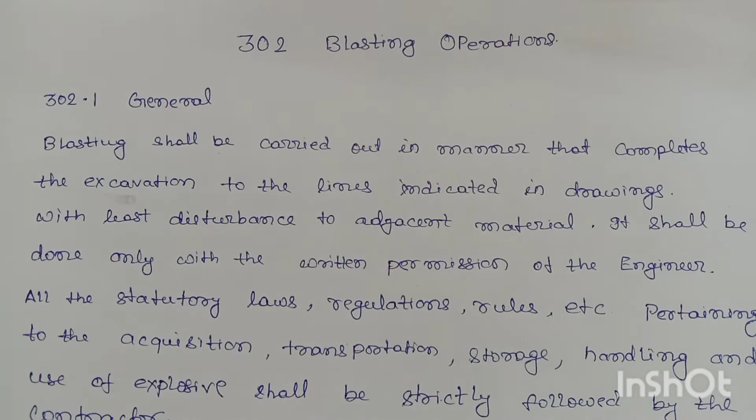All the statutory laws, regulations, rules, etc. pertaining to the acquisition, transportation, storage, handling, and use of explosive, all such shall be strictly followed by the contractor. The contractor may adopt any method or methods of blasting consistent with safety and job requirements.

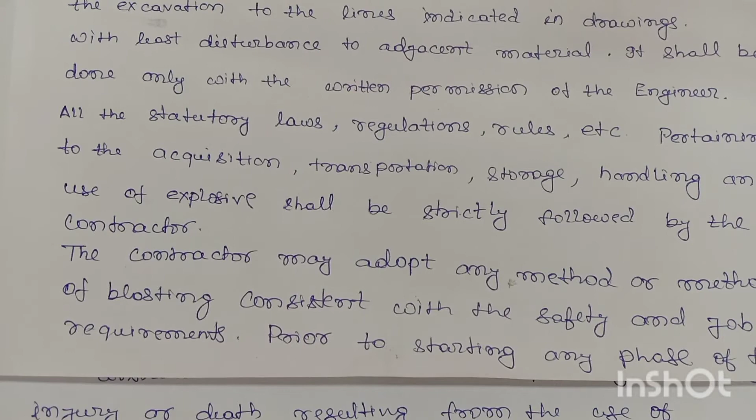Prior to starting any phase of the operation, the contractor shall provide information describing pertinent blasting procedure, dimensions, and notes.

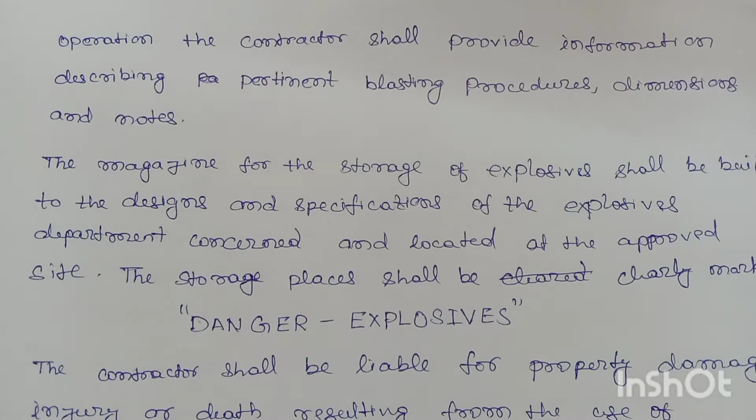The magazine for the storage of explosives shall be built to the design and specification of the explosives department concerned and located at the approved site. The storage place shall be clearly marked 'danger explosive'.

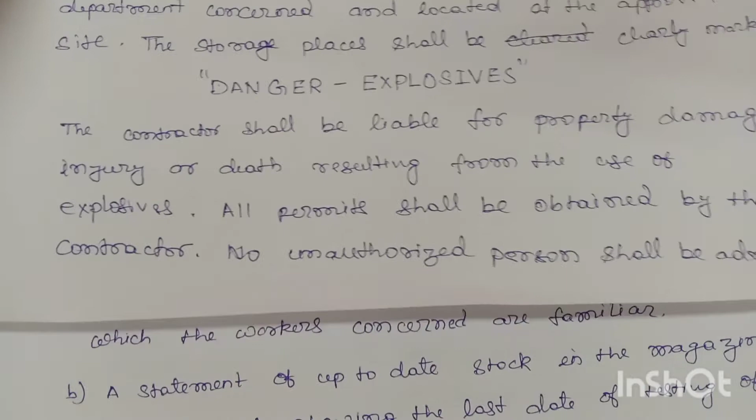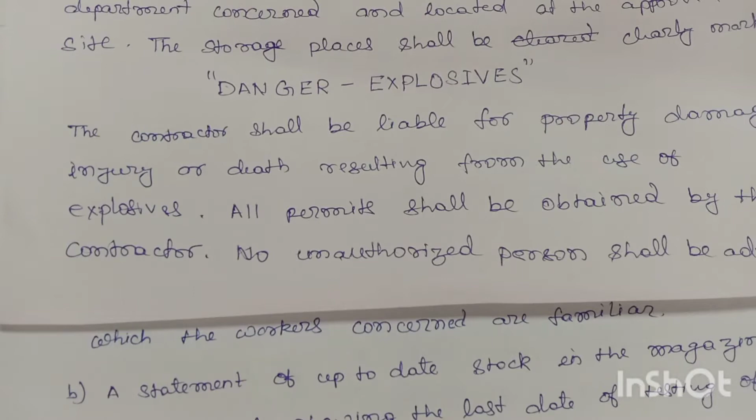The contractor shall be liable for the property damage, injury, or death resulting from the use of explosive. All permits shall be obtained by the contractor. No unauthorized person shall be admitted into the magazine, which, when not in use, shall be kept securely locked.

No matches or inflammable material shall be allowed in the magazine. The magazine shall have an effective lightning conductor.

The following shall be hung in the lobby of the magazine: a copy of the relevant rules, regulations, safe storage, both in English and the language with which the workers concerned are familiar; a statement of up-to-date stock in the magazine; a certificate showing the last date of testing of the lightning conductor; and a notice that smoking is strictly prohibited.

All explosives shall be stored in a secure manner in compliance with all laws and ordinances, and all such storage shall be marked. where no local laws or ordinances apply, storage shall be provided to the satisfaction of the engineer, and in general not closer than 300 meters from the road or from any building, camping area, or place of human occupancy.

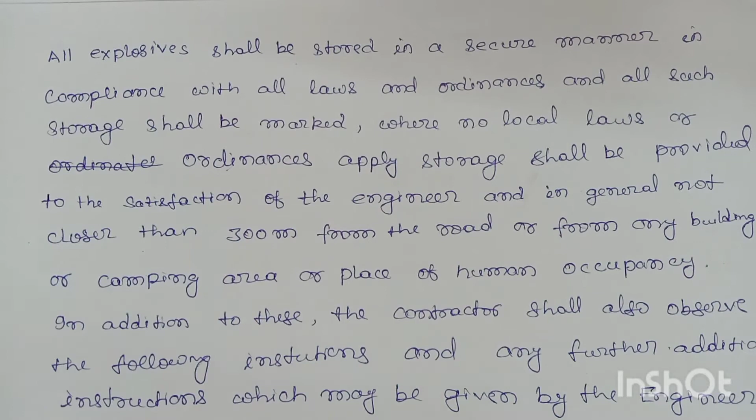In addition to these, the contractor shall also observe the following instructions and any further additional instruction which may be given by the engineer, and shall be responsible for the damage to property and any accident which may occur to workmen or the public on account of any operations connected with storage.

Handling or use of explosive and blasting: the engineer shall frequently check the contractor's compliance with these precautions.

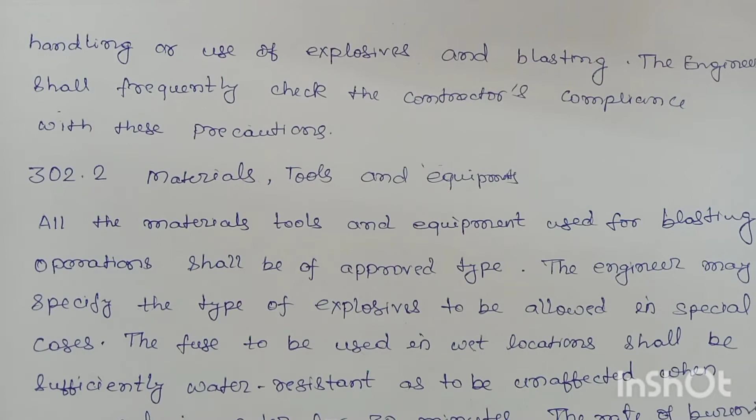302.2 Materials, Tools and Equipments. All the materials, tools and equipments used for blasting operations shall be of approved type. The engineer may specify the type of explosive to be allowed in special cases.

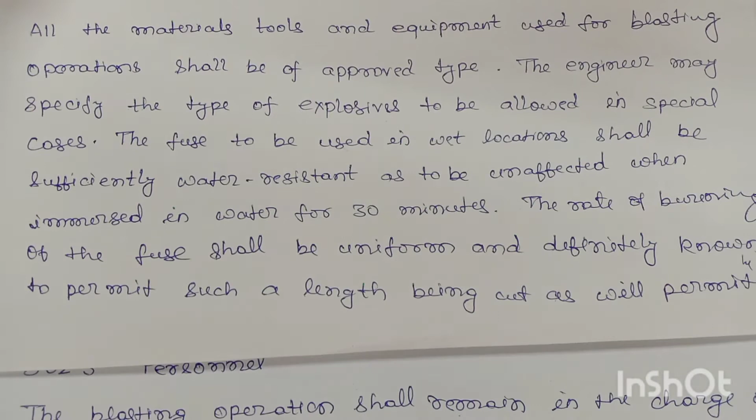The fuse to be used in wet location shall be sufficiently water resistant as to be unaffected when immersed in water for 30 minutes. The rate of burning of the fuse shall be uniform and definitely known, to permit such a length being cut as will permit sufficient time for the firer to reach safety before the explosion takes place. Detonators shall be capable of giving effective blasting of the explosive.

The blasting powder, explosive, detonators, fuses, etc. shall be fresh and not damaged due to dampness, moisture, or any other cause. They shall be inspected before use, and damaged articles shall be discarded totally and removed from the site immediately.

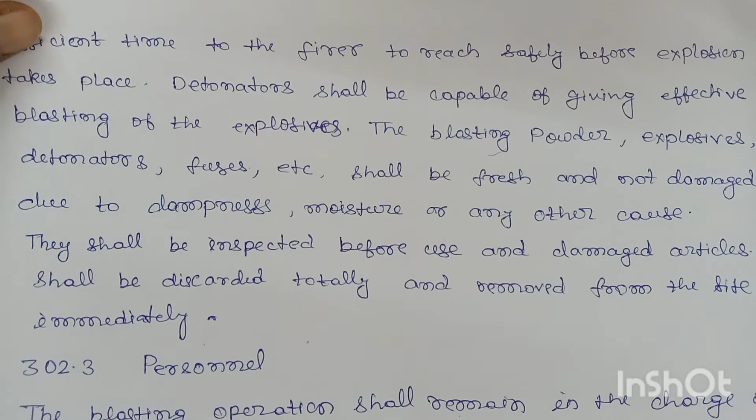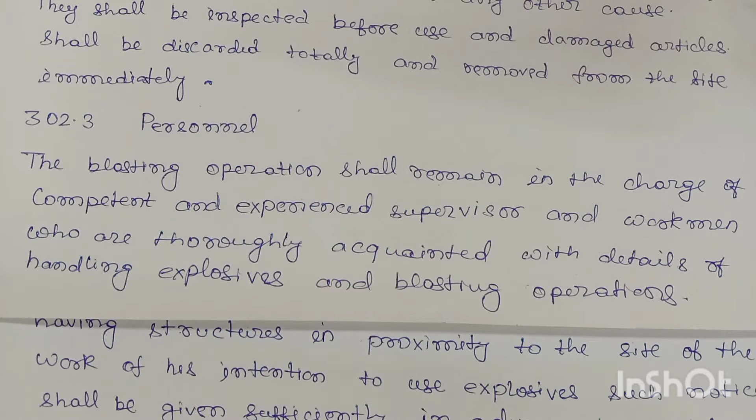302.3 Personnel. The blasting operation shall remain in the charge of a competent and experienced supervisor and workmen who are thoroughly acquainted with the details of handling explosives and blasting operations.

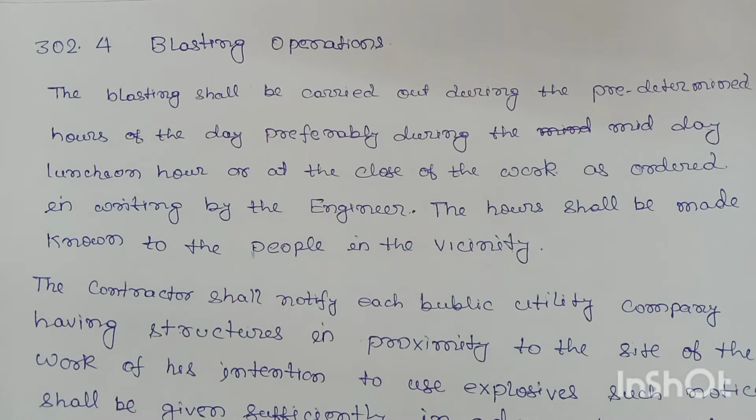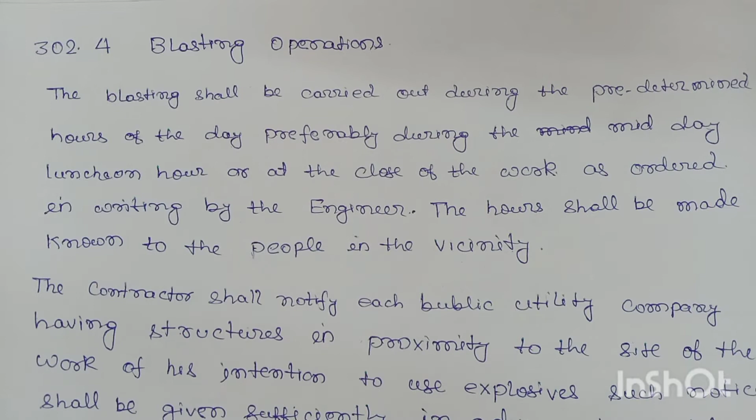Blasting operations shall be carried out during predetermined hours of the day, preferably during the midday luncheon hour or at the close of work, as ordered in writing by the engineer. The hour shall be made known to the people in the vicinity.

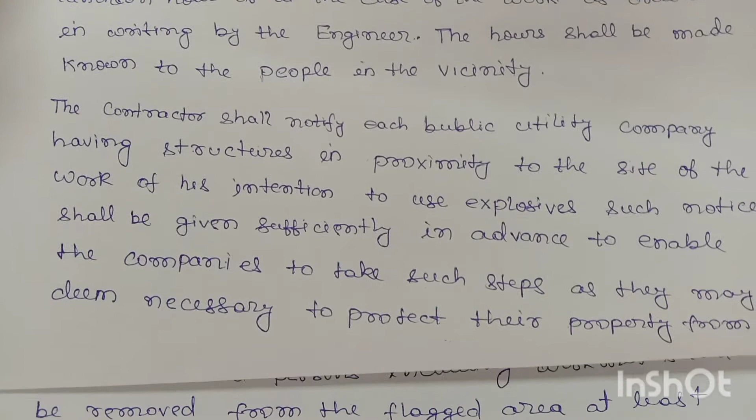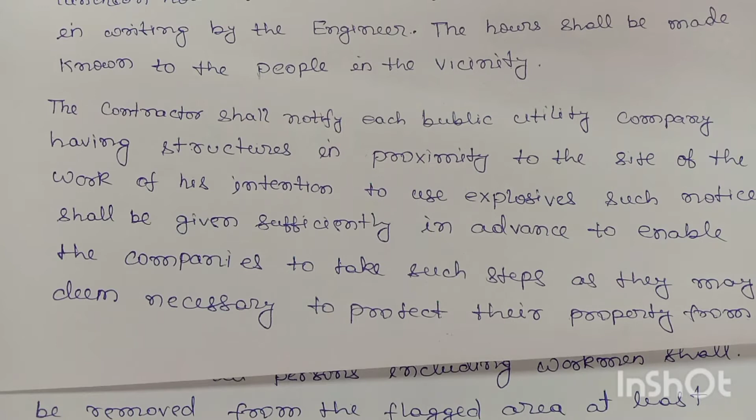The contractor shall notify each public utility company having structures in proximity to the site of the work of his intention to use explosives. Such notice shall be given sufficiently in advance to enable each company to take such steps as they may deem necessary to protect their property from injury.

In advance of any blasting work within 50 meters of any railway track or structures, the contractor shall notify the concerned railway authority of the location, date, time, and approximate duration of such blasting operation.

Red danger flags shall be displayed prominently in all directions. People, except those who actually light the fuse, shall be prohibited from entering this area, and all persons, including workmen, shall be removed from the flagged area at least 10 minutes before the firing. A warning siren shall be sounded for the above purpose.

Only controlled blasting shall be resorted to along with the safeguards above, at locations where built up area, huts and structures in use are within 200 meters. Similarly, excavation of hard rock without blasting is mandatory where people live within 20 meters of the blast site.

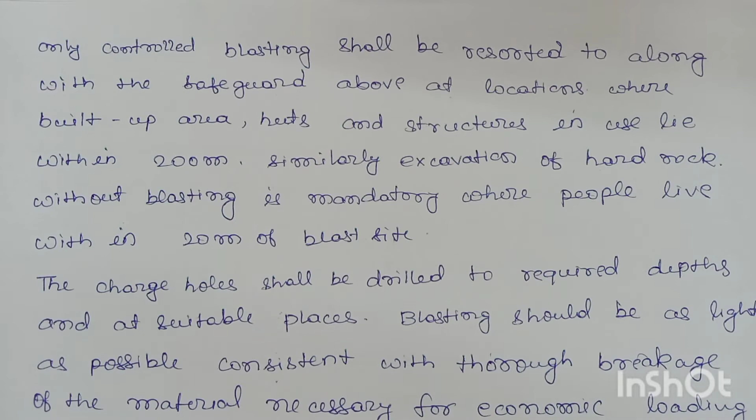The charge holes shall be drilled to the required depth and at suitable places. Blasting should be as light as possible, consistent with thorough breakage of the material necessary for economic loading and hauling. Any method of blasting which leads to overshooting shall be discontinued.

When blasting is done with powder, the fuse cut to the required length shall be inserted into the hole, and the powder dropped shall be gently tamped with copper rods with rounded ends. The explosive powder shall then be covered with tamping material which shall be tamped lightly but firmly.

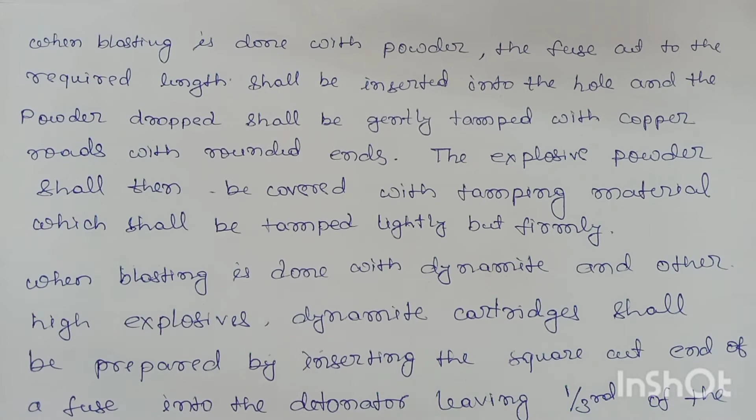When blasting is done with dynamite and other high explosives, a dynamite cartridge shall be prepared by inserting the square cut end of a fuse into the detonator, leaving one third of the copper tube exposed outside. The paper of the cartridge shall then be closed up and securely bound with wire or twine.

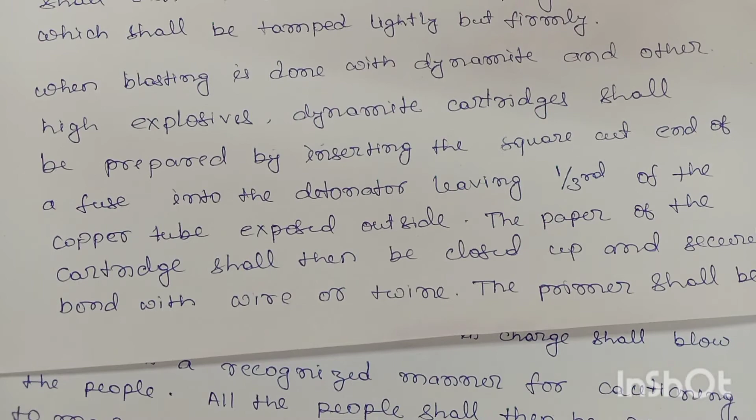The primer shall be housed into the explosive. Boreholes shall be cleared of all debris and the explosive injected.

The space of about 200 mm above the charge shall then be gently filled with dry clay, pressed home, and the rest of the tamping formed of any convenient material gently placed with a wooden rammer, at a time. Not more than 10 such charges will be prepared and fired.

The man in charge shall blow a siren in a recognized manner for cautioning the people. All the people shall then be required to move to a safe distance. The charge shall be lighted by the man in charge only.

The man in charge shall count the number of explosions. He shall satisfy that all the charges have been exploded before allowing the workmen to go back to the work site.

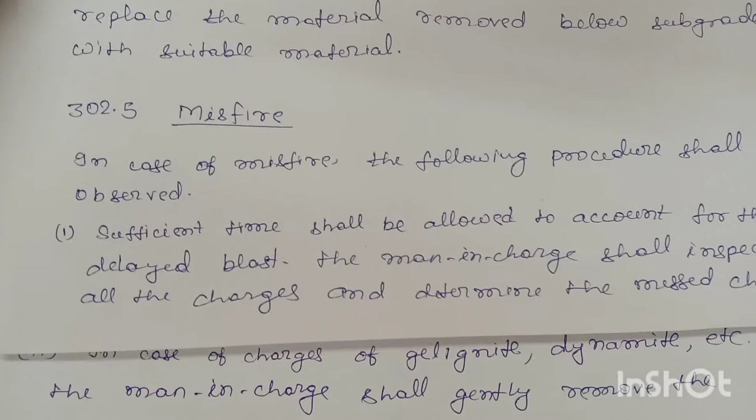Misfire - Clause 302.5. In case of misfire, the following procedure shall be observed. Sufficient time shall be allowed to account for the delayed blast. The man in charge shall inspect all the charges and determine the missed charge.

If it is the blasting powder charge, it shall be completely flooded with water. A new hole shall be drilled at about 450 mm from the old hole and fired. This should blast the old charge. In case it does not blast the old charge, the procedure shall be repeated till the old charge is blasted.

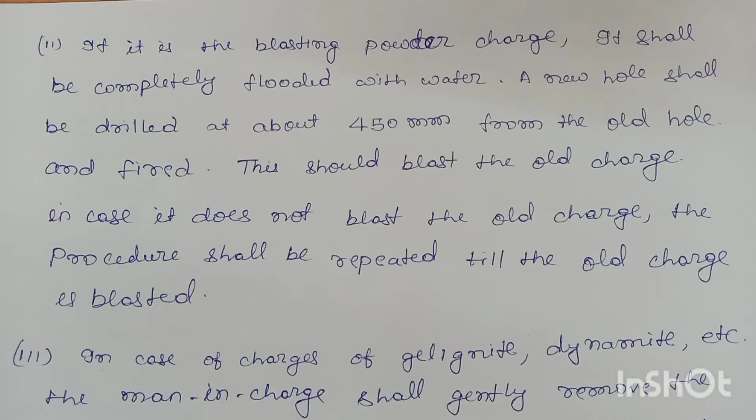In case of a charge of gelignite, dynamite, etc., the man in charge shall gently remove the tamping and the primer with the detonator. A fresh detonator and primer shall then be used to blast the charge.

Alternatively, the hole may be cleared of 300 mm of tamping, and the direction then ascertained by placing a stick in the hole. Another hole may then be drilled 150 mm away and parallel to it. This hole shall then be charged and fired.

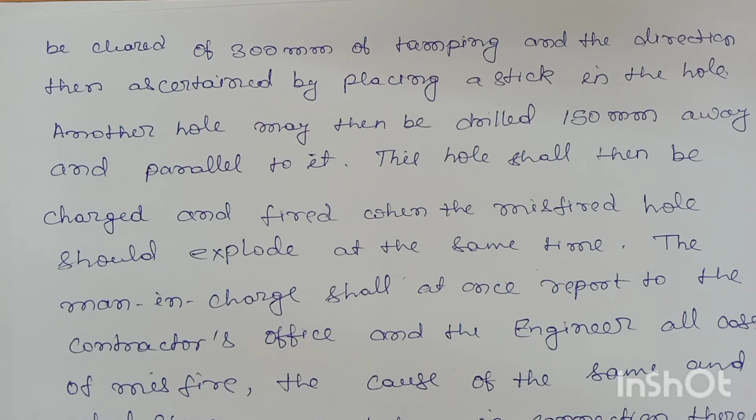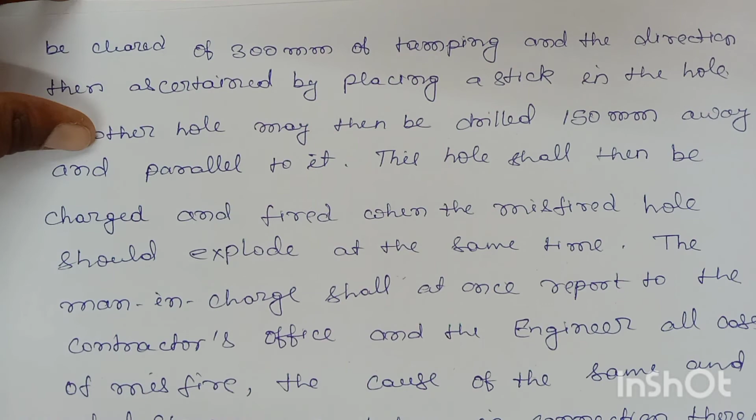When the misfired hole should explode at the same time, the man in charge shall at once report to the contractor's office and the engineer all cases of misfire, the cause of the same, and the steps taken in connection therewith.

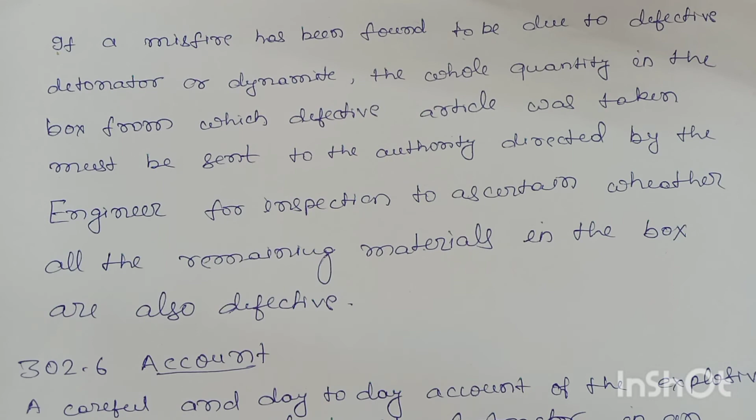If a misfire has been found to be due to a defective detonator or dynamite, the whole quantity in the box from which the defective article was taken must be sent to the authority directed by the engineer for inspection, to ascertain whether all the remaining materials in the box are also defective.

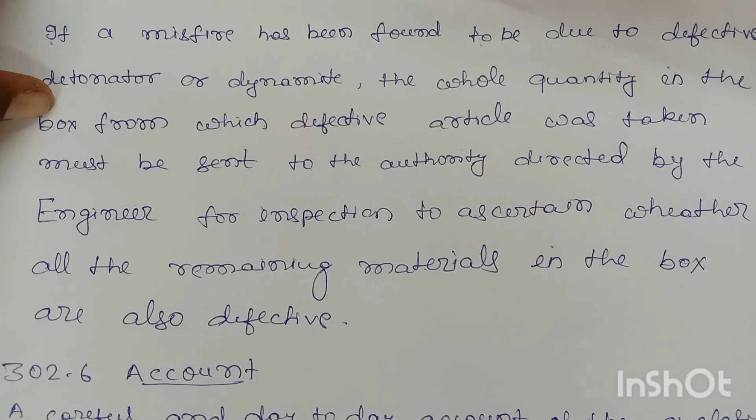302.6 Accounts. A careful and day-to-day account of the explosives shall be maintained by the contractor in an approved register and manner, which shall be open to inspection by the engineer at all times.